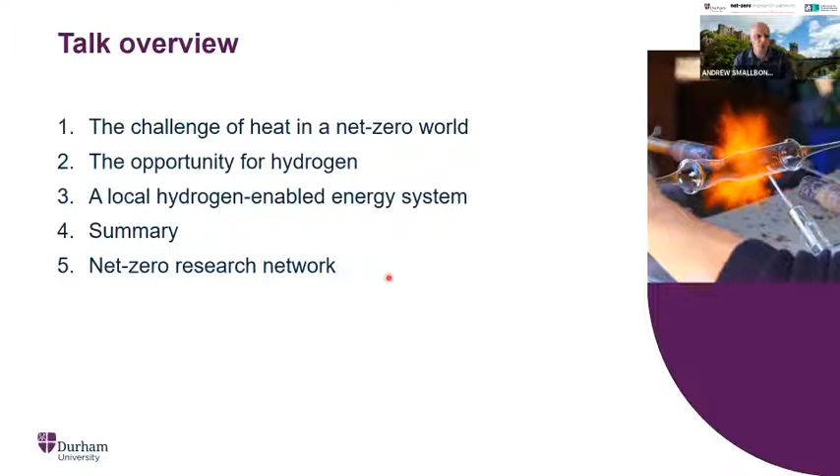So the challenge of heat is quite important, I think, when you look at it in the context of this very simple pie chart. And I'm sure, like me, everyone enjoys pies. You can see what the final energy demand is across lots of different sectors. This comes from the final energy consumption of the OECD countries, typically the wealthiest countries in the world, collated by the International Energy Agency. It shows you what, as consumers of energy, we actually expend our energy on. It usually surprises people to see that heat is actually about a third of the energy use, transport a further third, and then everything else in the final slice of the pie.

I think you can close your eyes when you think about energy policy and the pictures you see in the media around energy policy. Principally, they only show transport problems and electricity problems, but actually the forgotten cousin has been heat over the years. And I think that's now going to have to change quite dramatically. When you look at that heat segment, you can see where heat is actually used and who it's used by. We often think about heat as a problem for heating our own homes, because we see it on a day-to-day basis, but actually residential heating is only a third of that space.

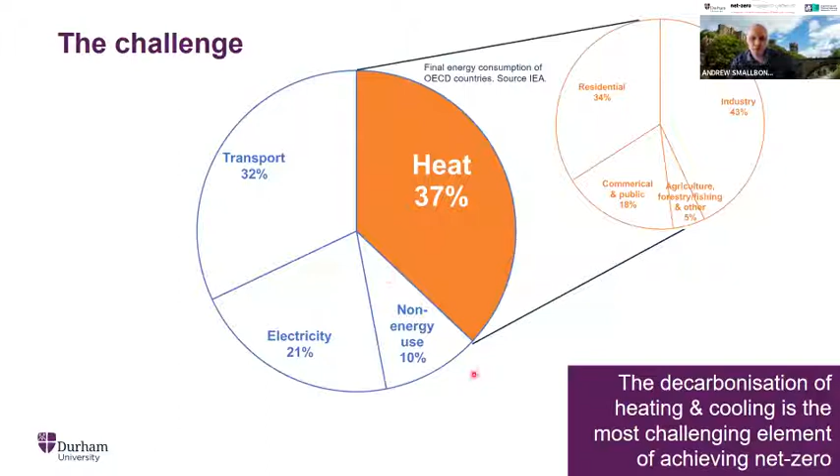And then to take that idea further and come back to the original pie chart and look at some of the challenges here around transport. If you look at transport in itself, most vehicles are actually 25% efficient and are using petroleum as their driver and powering the system with that petroleum. But actually, with a 25% efficiency, the rest of it is lost as heat. So that 32% is actually, most of it, heat itself or lost as heat. And you could say similar things about electricity as well.

For example, this data set includes energy users from the Middle East, and up to 50% of their peak electricity use is actually used for cooling their buildings and properties. So again, it's starting to fill up the pie, that in practice, heat is a major challenge. And then you have to remember also that electrical systems, in practice, a lot of the inefficiency is because they get hot, and you're trying to get rid of the energy from that out of the electrical system. So you can start to see that we start to build this pie up quite considerably.

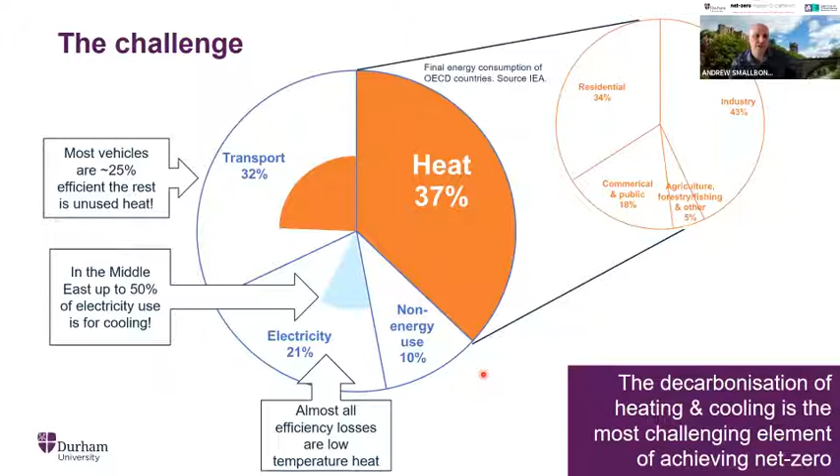Some of these could be discussed and debated, but ultimately it leads to the picture that the decarbonisation of heating and cooling is very complex, and it cuts across almost every problem in decarbonisation. And many consider it to be the most challenging element of reaching net zero. So you've got this overarching challenge, and then you've got the thing that makes it rather different to transport and electricity, because heating has a direct link to mortality. Not driving a car is possible, but turning off your heat is not possible because obviously there are lots of negative impacts.

And when you start to look at what's happened to society, and this data here comes from London, when the temperature goes down, you start to see why. Across the bottom there, you can see what the temperature was when somebody died. A very morbid picture, but you can see that the majority of people die in moderate temperatures. But the line at the top, shaped as a U shape, is actually the relative rate of death as we move to the extremes of temperature.

And as the outdoor temperatures drop below 2 degrees here, you can see that we get a very rapid increase of people dying, maybe not directly because of the heat, but the death rate increases. Now, if you contrast that with other places, this data here is from Stockholm in Sweden, and maybe their infrastructure is more appropriate for lower temperatures, and through technology and different ways of dealing with cold, they have managed to solve this problem. They no longer have a tick which goes up. So you can do things to alleviate the problem of increased mortality as a result of reducing temperatures.

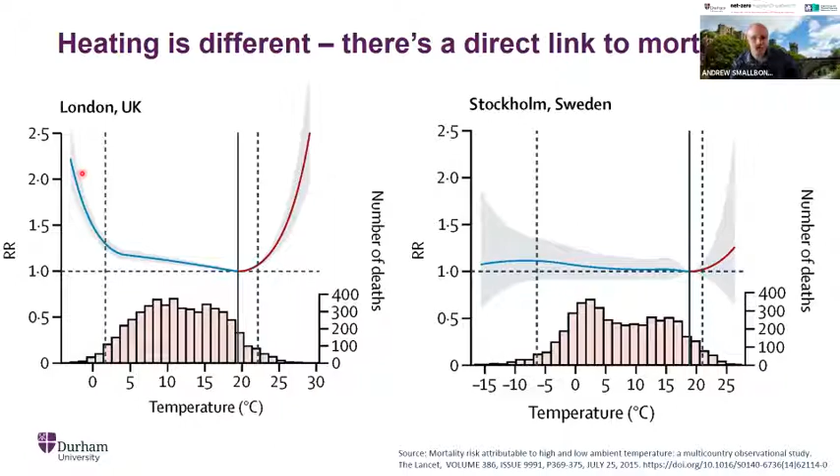Now, technologically, there are lots of different solutions out there for delivering on net zero targets whilst keeping the heating on, and many of them are mapped out in this slide here. The most common, and the one people have talked about considerably to date, has been improving efficiency and increasing the amount of insulation in your properties. This has been a driver well before we started announcing net zero, as has the implementation and increasing use of heating and cooling networks. And these two things will go on in parallel with our race to net zero, I'm sure.

This heating and cooling network has been constantly there through many generations. It's never really happened for practical reasons, and we may well not see this done at scale before the 2050 targets.

We certainly need residential heating and cooling solutions. In the UK, we obviously have well-established platforms for delivering residential heating, but we're also expecting to see temperatures rise in the UK, particularly in the inner city. So we may well see quite considerable changes in the amount of times you see air conditioning installed on the side of a property.

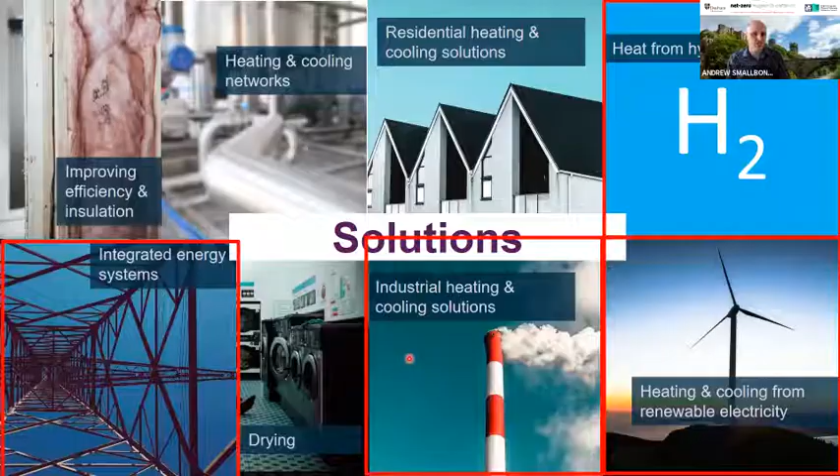This talk focuses on heat from hydrogen, heating and cooling from renewable electricity. There's some links with industrial heating and cooling, and we're certainly going to be talking about integrated energy systems. Now, there is a huge opportunity for hydrogen, and this is what we've been spending a lot of time and energy on in the last couple of years.

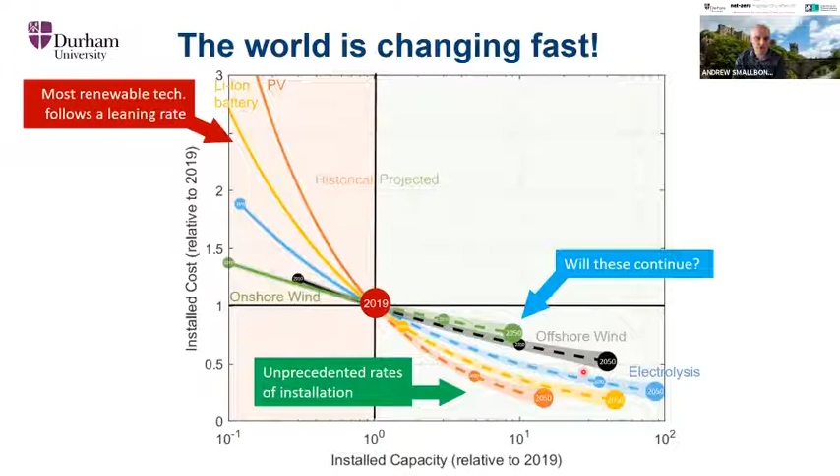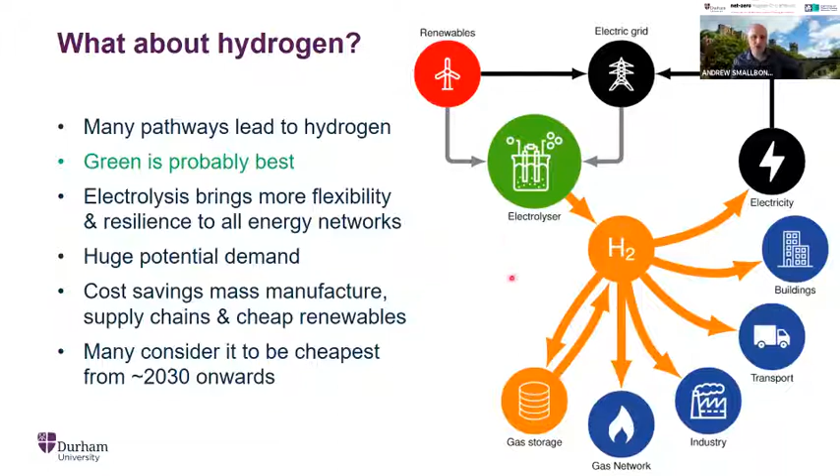And this will be driven principally by the cost reductions that come from electrolysis and the additional cost savings made by reducing renewable costs. Many consider this pathway to be the cheapest way to produce hydrogen from around 2030 onwards. So whilst in the short term we may well see the use of CCS as a model to remove the carbon from natural gas, its long-term application is through electrolysis here.

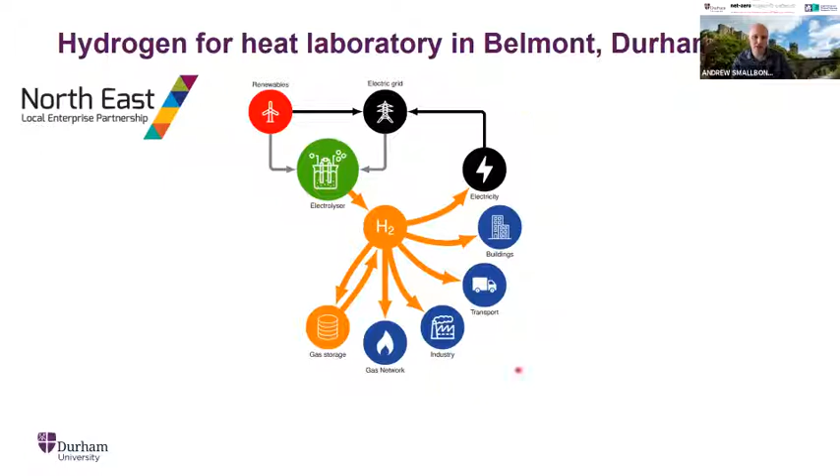And what we've been working on in Durham is to build up a hydrogen for heat laboratory in our Belmont site. This has been done through a grant from the North East LEP, where we've built a platform which will allow us to demonstrate this kind of energy system in practice. So the first thing is we've built an electrolyzer system and gas storage system where we can demonstrate the pathway of renewable into the electrolyzer to store hydrogen and then deploy that as electricity and provide that back to the grid. And we're starting to finish this system and commission it right now.

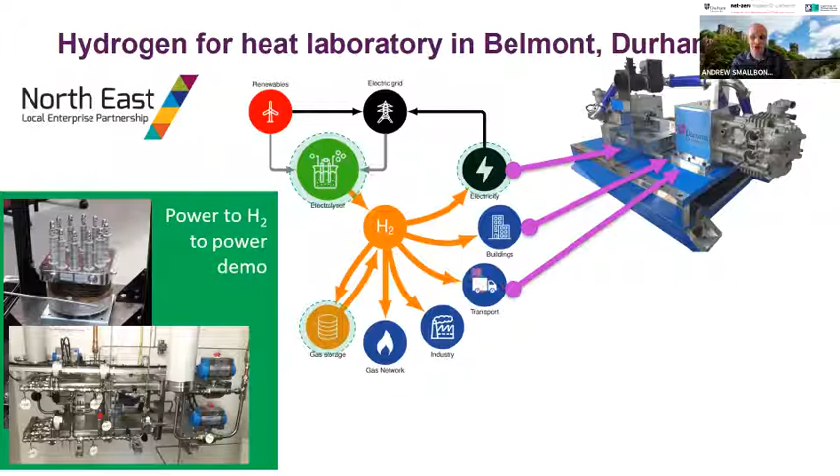We're also starting to commission a combined heat and power system, which will be able to produce electricity from hydrogen, but also be able to produce heat for buildings. And the same system could also operate on a transport vehicle to provide electricity on board the vehicle.

We're involved in the IDRIC project, which is the UK Industrial Decarbonisation Research and Innovation Centre, a £20 million investment into academia to support the decarbonisation of industry. And we're going to be working closely with the Teesside cluster on their transition to net zero. We're going to be modelling the industrial network and energy networks locally and embedding hydrogen in there to see how it could be best supported.

Finally, we're involved in the Future Grid project run by the National Grid, and it's called Future Grid. And the objective is to supply 100% hydrogen into the national transmission system and to understand its dynamics. So that then enables us across our laboratory to analyze all the different nodes across this potential future hydrogen energy system.

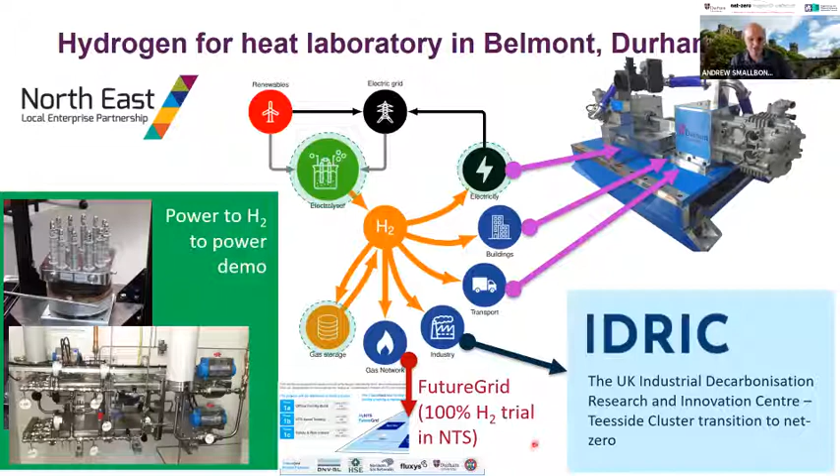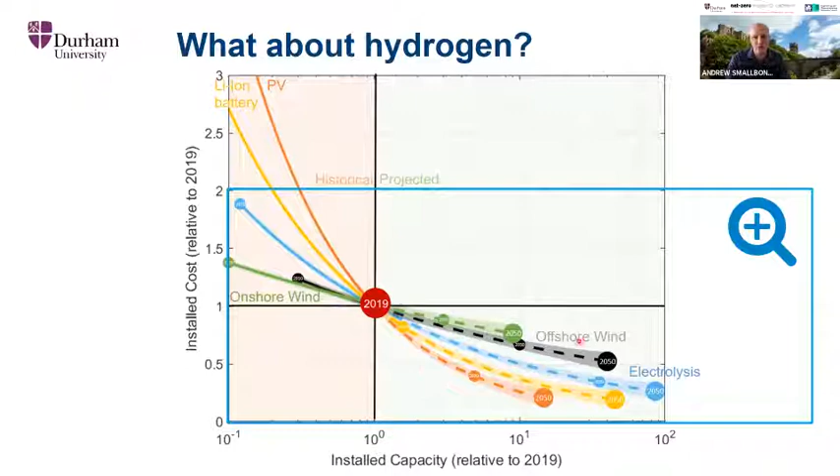Now, coming back specifically to this chart, which I was mapping out and talking about earlier, I was focusing on this blue line now, the line that has been plotted for electrolysis. And if we focus in that in more detail and we plot only data for electrolysis in there, we kind of come up with this more detailed graph.

So up here at the top, you can see some of the raw data that's available for large-scale electrolysis in terms of its costs. Okay, the data up here is from around 2010, and as you can see, there's not that much data back in that period of time, and there's more data as we move forward. That's simply because the availability of large-scale deployment of PEM electrolysis is only a relatively recent activity. So there's very little data to base this on. And again, that's historical measurements.

If you then start to look at this data in more detail and think, well, this is how a power law can be fitted through this data to kind of make an estimate as to what the future costs might be, you can start to see that actually you could probably fit this line through this data set a number of different ways. A lot of the weightage is actually towards this one here, for example. So by playing with those kind of parameters, you can actually start to see how important, and this blue area here represents all the different ways that you could potentially selectively draw lines through this data to kind of show the uncertainty that there really is around the cost of electrolysis going forward.

Now, what I've also plotted in here is different analysis and different activities that people have tried to estimate the future price of an electrolyzer system. Some of them are more pessimistic than others, but overall you can see that they're all expecting costs to come down quite significantly. I guess around the 2030 era, we're looking at 10 times what we've got of our current installed capacity, and then maybe 100 times around the 2050 timescale. You can see actually as you move to some of these other analysis, they're expecting renewable hydrogen to scale up more than 200 to 300 times compared to what we've got right now.

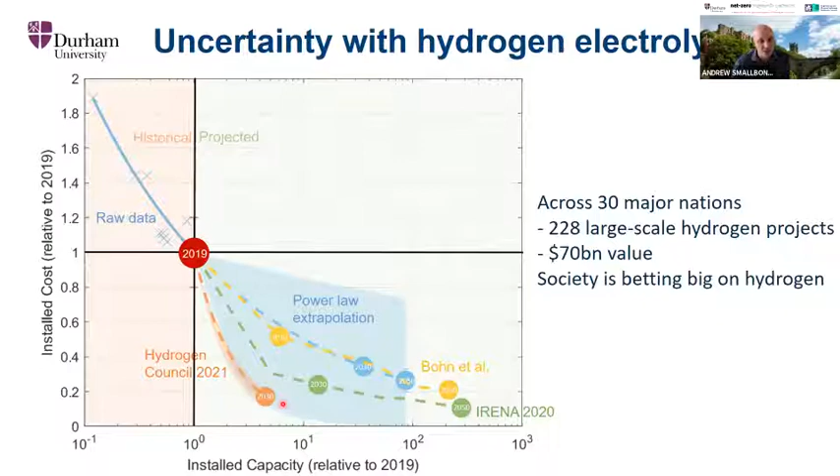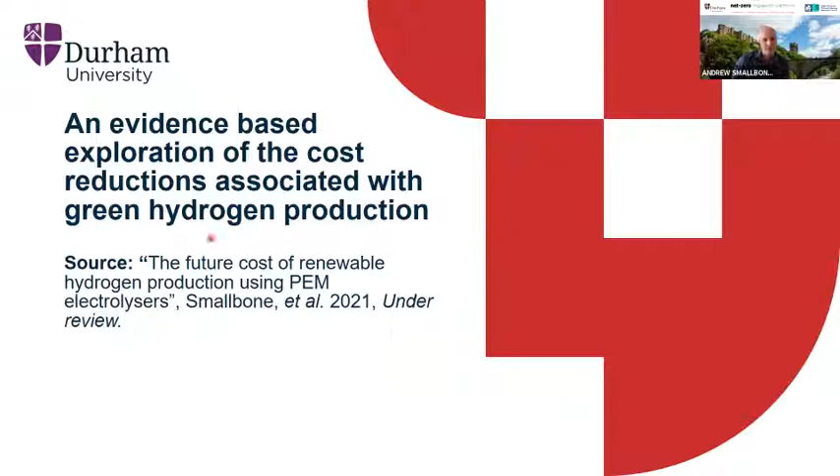So what we wanted to do was to try and understand this dynamic of what is the future price of hydrogen, and how could this be achieved. So we started to look at this opportunity. So we wanted to do an evidence-based exploration of the cost reductions associated with green hydrogen production. And actually this is some work that's currently under review by the team. And what we did was we went out and we built what's called a techno-economic model. So it brings together the data that we've got around the technical side of a system, and tries to understand also at the same time the economics of building such a system.

So we based our analysis around building lots of smaller electrolyzer systems that could be deployed in parallel. So we based it around a 200 kilowatt system. I built a technical model of that system, reflecting the efficiency, energy consumption, and the required different sizes of different components within that system. We then built an economic model, going through component by component, trying to understand each component's cost, its potential supply chain, and then finally bringing forward a model of the manufacturing process itself.

Again, manufacturing each component in a common site, understanding what raw materials they required, the production line itself, including the staff, and then to take that from a system which was maybe producing 10 per year to thousands per year. And as you can imagine, this would start off with a small team building by hand, and then at the other end of the scale, we would be producing thousands of units, and it would be either automated or semi-automated.

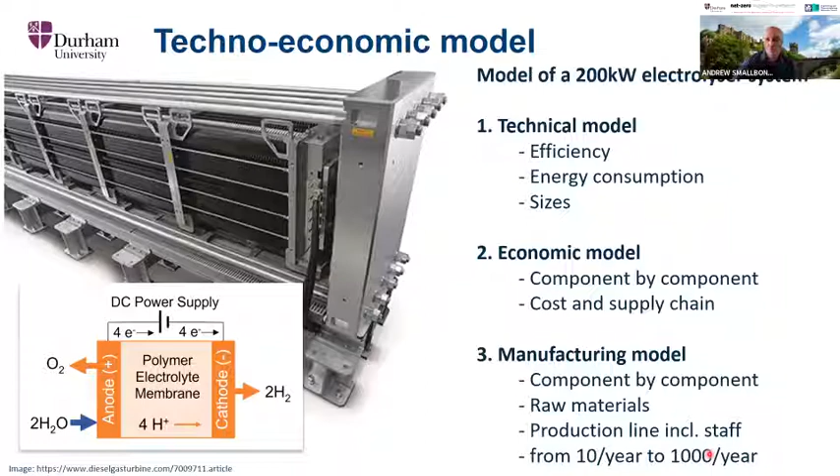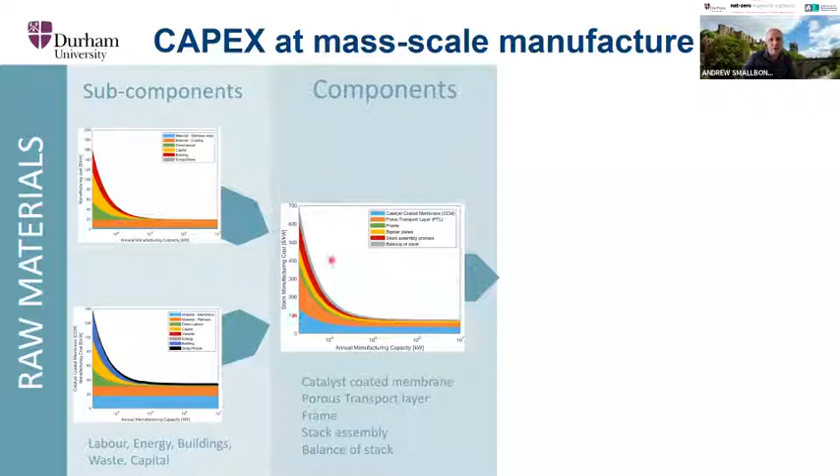Now, when you look at the model that was developed, we kind of start off with raw materials. We then figure out what are the subcomponents of an electrolyzer system, worked out what the labor costs, the energy costs, the building rent costs, any waste, any capital that would be required to build them, and then to build that up into the components that could be used to assemble the system. And then you end up with the full system, the full PEM electrolysis system.

You can see here from this chart, at the bottom here, we've got the annual manufacturing capacity. Note that this is a non-linear scale, it's a log scale. So here we've got a very small number of units being built per year. And at this end, it's the 5,000 units being assembled.

And as you can see, as you scale up the size of your plant, the total cost, which would be the sum of all of these different components, actually comes down. You can see that moving quite dramatically down there from about $2,000 per kilowatt down to about $500 per kilowatt as you move through this curve.

You can see that it's broken down quite interestingly, by individual components. The stack, which is, I guess, the main bit, the stack of electrodes. That's the blue. The balance of plant, which is basically the supporting infrastructure that cools the system or dries the system. That's the orange here. You've then got installation costs, and then the top bit is the markups. The business who's building these systems has got some kind of profit.

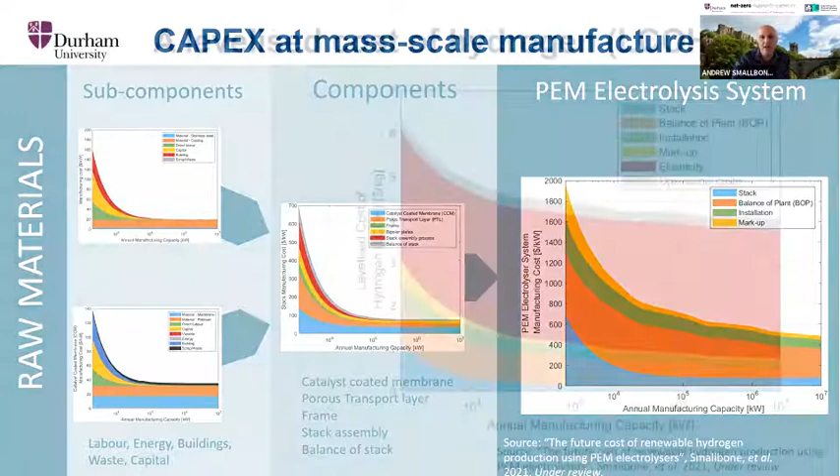So in the case of the stack, as you move in this direction, you're mainly dominated by the raw material cost of the system and less by the human or resource intensive aspects associated with having staff. So we're likely, through the scale up of manufacturing, to be able to make dramatic savings on the cost of the system. And we can take that idea a little further and go from the capital cost of an electrolyzer system to establish a levelized cost of hydrogen.

Now, building on the capital cost of the system, you can make lots of different assumptions about the future electricity price, how much you would use the electrolyzer, so its capacity, and also the operational cost of a large scale plant. And ultimately, this is what yields your levelized cost of hydrogen. We've made some simple assumptions, and there are lots of ways of painting this picture, but generally the story is as I describe in the next few slides.

Now, for context, often hydrogen is represented in price per kilogram. This is quite convenient because about 1 kilo of hydrogen has got the same amount of energy as 1 litre of gasoline. So when you see 1 kilo of hydrogen, you can relate that back to a litre of fuel.

But what you can see here is that as you move from small scale manufacturing to large scale manufacturing, the cost of electricity is overwhelmingly the most important factor in driving the price of hydrogen. Initially, at small scales, like in current times, it's the capital cost of the system plus the electricity, but the system itself becomes much less significant as we manufacture more and more of these systems.

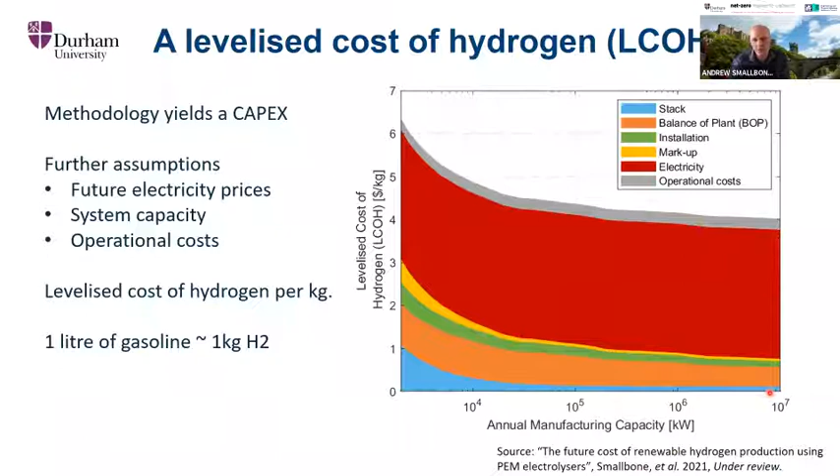Now we can take that and start to then think about, well, what about if we scale up to 10 times or 100 times of green hydrogen? The levelized cost of hydrogen currently would sit around here, this kind of figure from this kind of technology, and we would estimate that manufacturing cost savings that I just described would reduce this down by about a third, which if we were manufacturing at 5,000 units would give us a cost of 4.16.

And then if we start to scale up 10 times larger, we would start to expect to see other factors coming in. So we would expect to improve the efficiency and the lifetime of our system. And we would also, during that time, expect to see the offshore wind costs coming down. So offshore wind is probably going to take off another $1 off of that price, bringing us down to the $2.63 at the 10 times scale up.

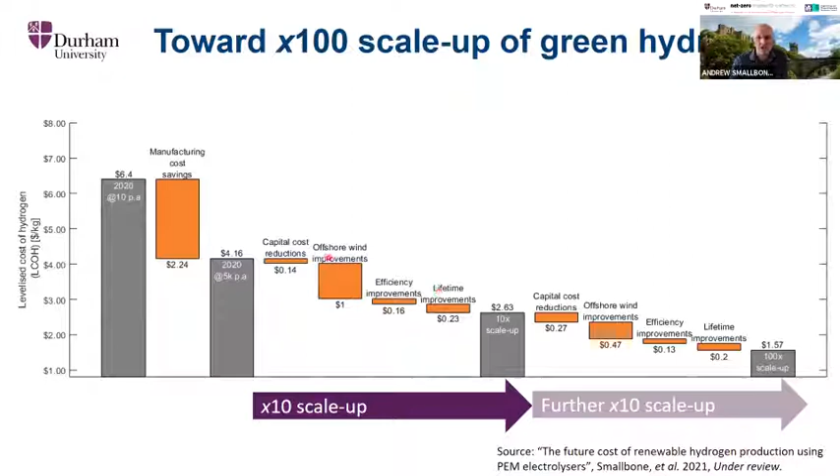Again, we could go forward and take that up to 100 times scale up, and a similar trend would exist, which would take us down to the $1.57. $1.57 for a kilogram of hydrogen would be very disruptive and would be transformational in terms of the sector. But you can see there the story through how the price of hydrogen is expected to come down is shown as a combination of this manufacturing savings, some improvements to the system, as well as savings driven by offshore wind reductions.

So these costs have implications on what might happen to the hydrogen economy. The first is to show that same chart again, and to remember again that there are many pathways which lead to hydrogen, and we are focusing on just one. And of course, there is the opportunity for scale here. But the most common question you get is that there are other pathways to coming to a decarbonised economy, and these need to be considered in context with what's happening here.

So the first thing to say is that we've focused principally on the cost of hydrogen production, but there's other factors as well when it comes to the cost of a system. You've got the distribution of hydrogen. So that could be through pipelines, it could be through truck delivery of gas, or it could be truck delivery of liquefied hydrogen. So there are different ways of moving it around.

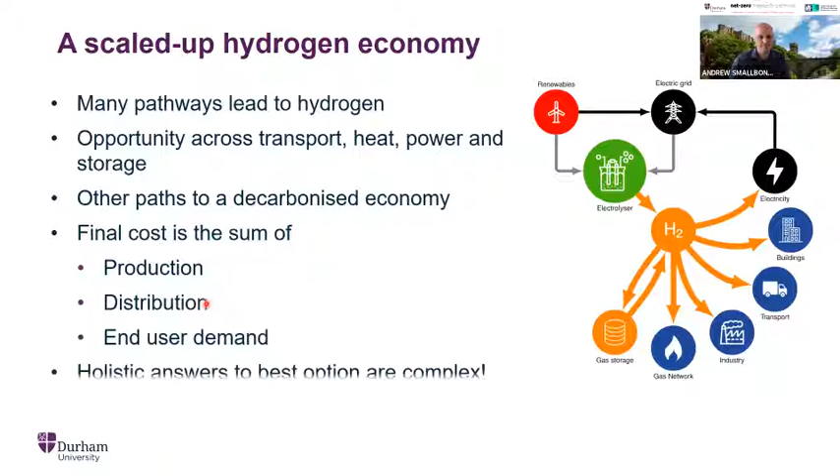For simplicity, we're going to assume that hydrogen gas is distributed via a natural gas network which already exists. So somewhat similar to what we have today, but the hydrogen system has repurposed the natural gas network. This has been selected on the basis that it's the cheapest model for distribution. And if it doesn't work here, then hydrogen is more challenging to deploy in other ways. So that's why this one's been picked.

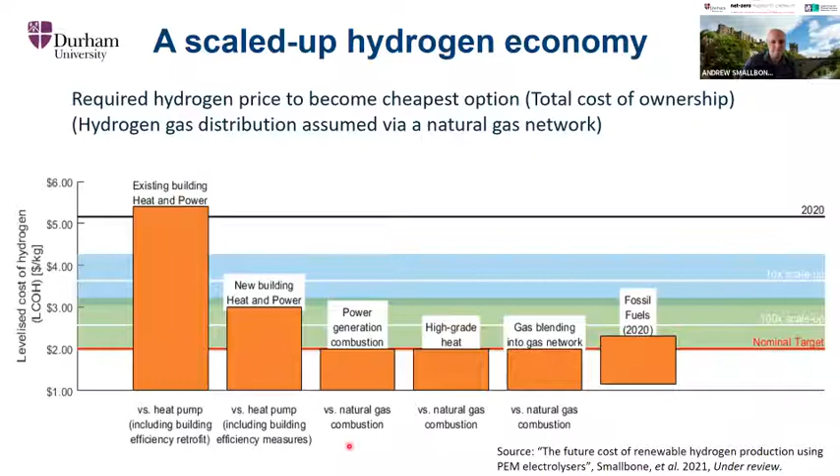So quickly to summarize: hydrogen is an option for heat, transport, power and energy storage, and a scale up of green hydrogen of up to 100 to 300 times is expected to deliver net zero targets. Green hydrogen is expected to become cheaper than blue within the next 15 years. Mass manufacture, lower electricity costs and improvements are expected to reduce the capex and overall cost of these systems. And even at the 100 times scale up, net zero heat is more expensive than fossil derived fuels. And this last point is extremely important. We often think about net zero heat, but as I described at the very beginning, there's a link to mortality if not enough heat is available at cost.

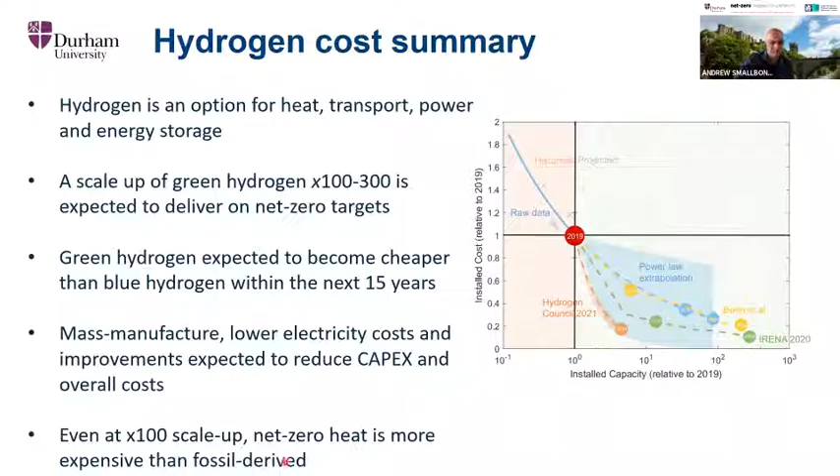So now I'll quickly talk about a local hydrogen-enabled energy system. This one is related to a project we're undertaking called Zero Carbon Emission Integrated Cooling, Heating and Power Networks. Effectively, this project looks at the techno-economics of hydrogen-enabled energy systems and attempts to quantify their value in terms of resilience and flexibility, and to demonstrate them in the lab. We're also quite keen to look at consumer attitudes to hydrogen, where initial feedback from lots of projects suggests consumers' fear of them may well be overstated.

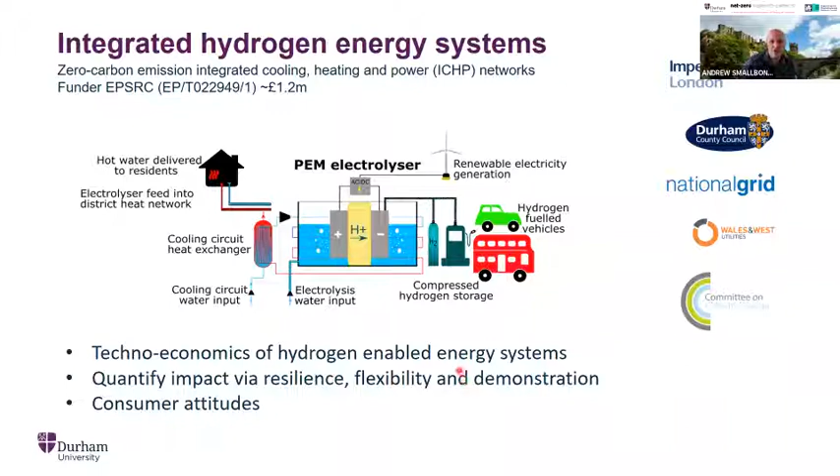What we wanted to look at particularly was the opportunity of an energy system where large-scale PEM electrolysis was carried out. What we know is that the electrolysis system is between 60 and 70% efficient. So that's 60 to 70% of the electricity turning into hydrogen itself. The rest is actually lost or dumped as heat. Interestingly, the temperatures of that heat are quite high and actually quite compatible with the kind of temperatures you might want in a heating network.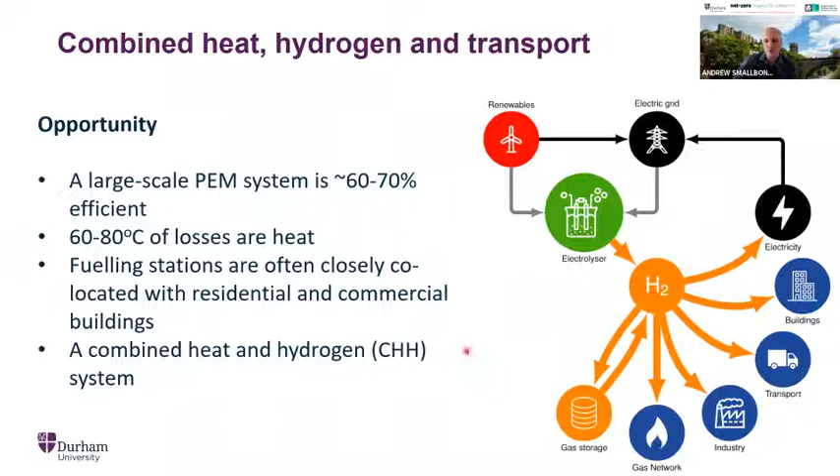So given that fueling stations are often closely co-located with residential and commercial buildings, we wanted to look at the potential for a combined heat and hydrogen system, where the heat would supply thermal energy to residences and commercial buildings, and the hydrogen would be used to fuel transport vehicles. So just to illustrate what that would look like, renewable electricity would be supplied to the PEM electrolyzer.

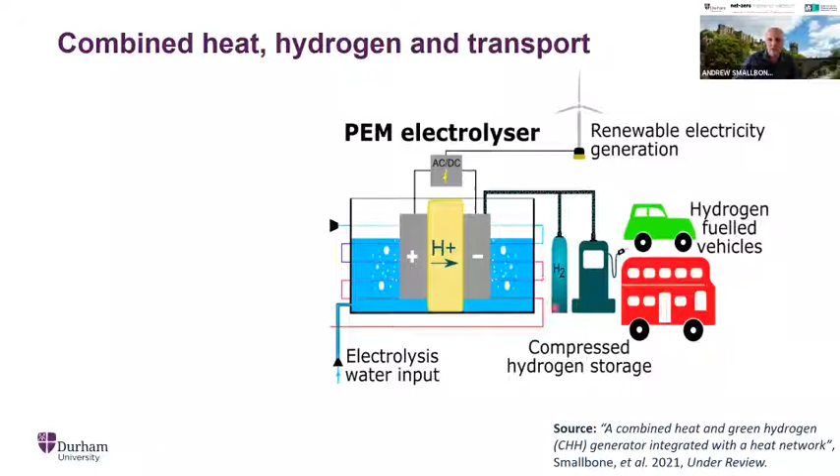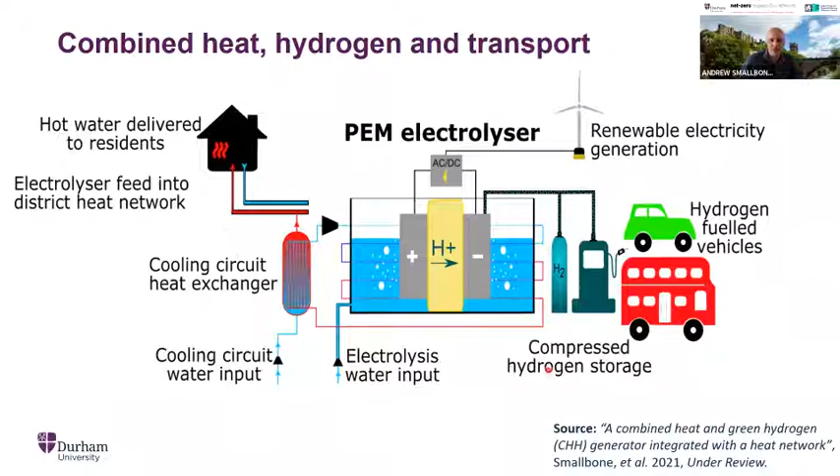The PEM electrolyzer would then provide hydrogen and store compressed hydrogen for use on hydrogen-fueled vehicles. And then that system would be cooled effectively by water, which would then be used to supply hot water for heating or domestic hot water within buildings. And the question is, would this be of value, and does this make sense?

So what we came up with was we developed a model of a PEM electrolyzer process, and we gathered some data from a 1 megawatt system, and that chemical process model plus the data allows us to work out where heat could be captured from such a system and what might be possible. So the hydrogen gas itself was actually 63% efficient. That's where 63% of the energy went to, but 30.4% of the heat can be recovered from the stack, and then the hydrogen gas comes off the system hot. So there's two potential pathways for capturing additional energy from the process, which would normally be released.

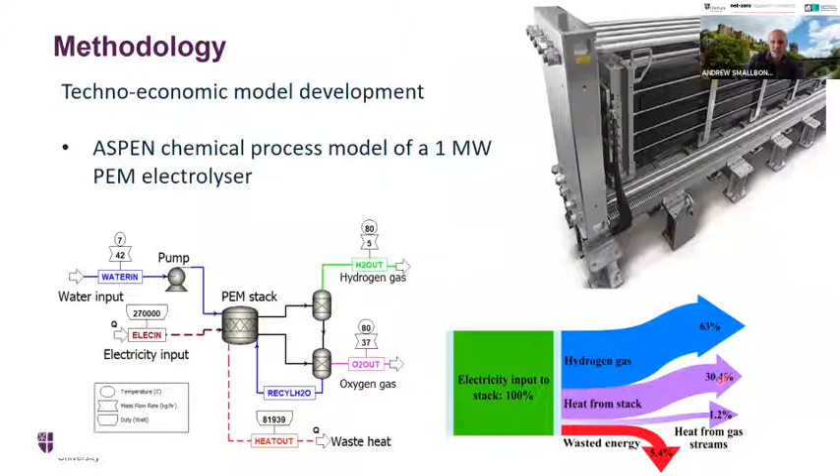We then took that forward and established a scenario, which we called a 2030 hydrogen fueling station scenario, where that fueling station would have a 12 megawatt electrical connection, and it would run off peak, so between 1 and 6 a.m. The system would effectively fill itself up with hydrogen and produce just over a ton of hydrogen, which would be the equivalent of 15 trucks or 200 cars worth of hydrogen gas.

And that process would produce 19 megawatt hours of heat per day. And the idea was that we would sell that heat back to the district heat network at their cost price, so consumers of this heat wouldn't pay any more than they would otherwise. And this works out to be about 190 homes worth of heat, or about 20% of what would be loosely termed a large heat network.

So the observations from this analysis were that if you do it this way, obviously your price of hydrogen or heat is highly sensitive to the price of electricity, because it's the main cost to the system. And of course, we're planning to run the system off peak, but the price of electricity obviously varies for lots of different reasons. So this is one thing to be careful of.

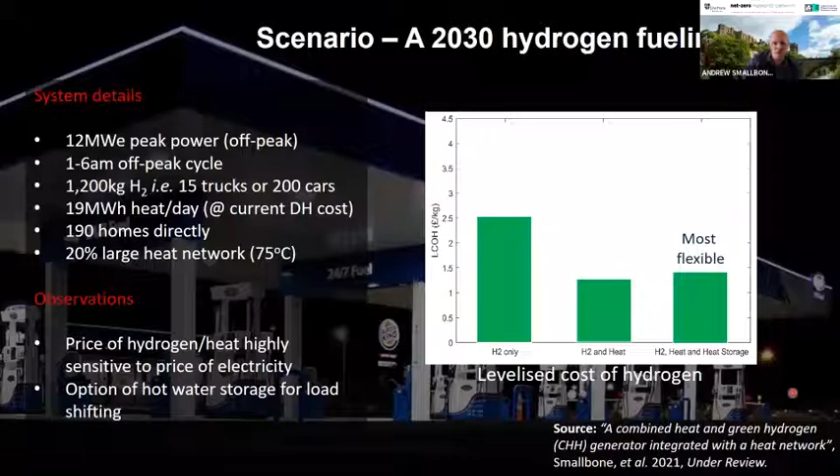So we're continuing to look at this concept in more detail now, and we are pushing on with that. To summarize the outputs, this co-production of heat and hydrogen for transport brings huge cost benefits to both local users of the hydrogen filling station and the local community that sits around it. There's obviously scope that hydrogen can be used for industry or direct heating too, so it's not just about transport. What's interesting is that the electricity is distributed off peak, so rather than going through gas networks or trucks, you get a lower cost potentially as a result.

And we are putting forward this more distributed model of hydrogen production for transport, and integration into heat networks, which is a solution which decarbonizes both sectors. This solution would bring overall energy efficiency up from 63% to more than 90% when you add up what's possible here. And of course, it makes the whole system much more resilient too.

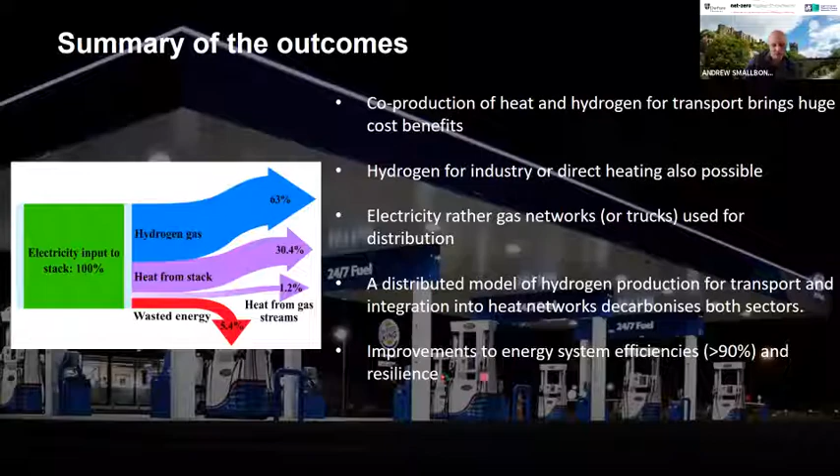So quickly, to just summarize, really, I've discussed some aspects of the decarbonisation of heat. I think I hopefully have illustrated that it's complex. It's certainly a challenge which cuts across every sector. It will cut across every industrial process. And I would imagine it will affect every person living in the UK over the next 30 years.

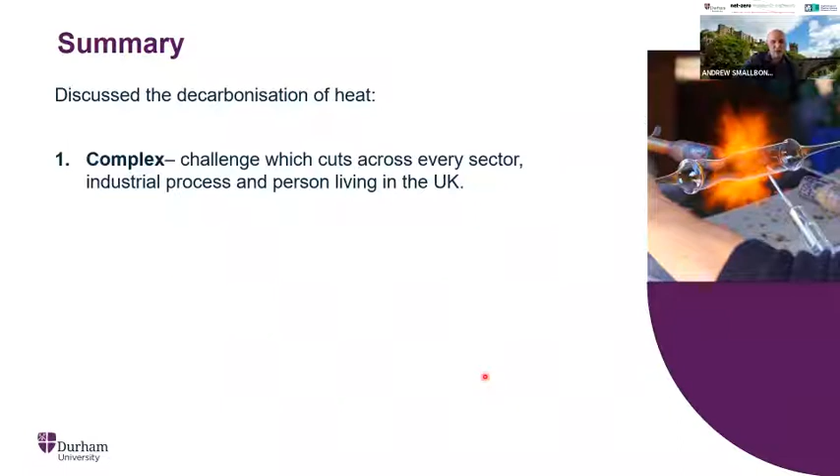There's hugely changing dynamics of price in renewable energies, and heat is likely to become more expensive, mainly because of a large capital expenditure is required to replace the fossil sector. And some very difficult decisions need to be made, and there's still uncertainty actually as to what the best solution is for each region, sector and application.

And I've given some examples of how heat can be decarbonised, and there's huge scope for innovation, way more than I've been able to talk about here. And there's an opportunity for solving this challenge.

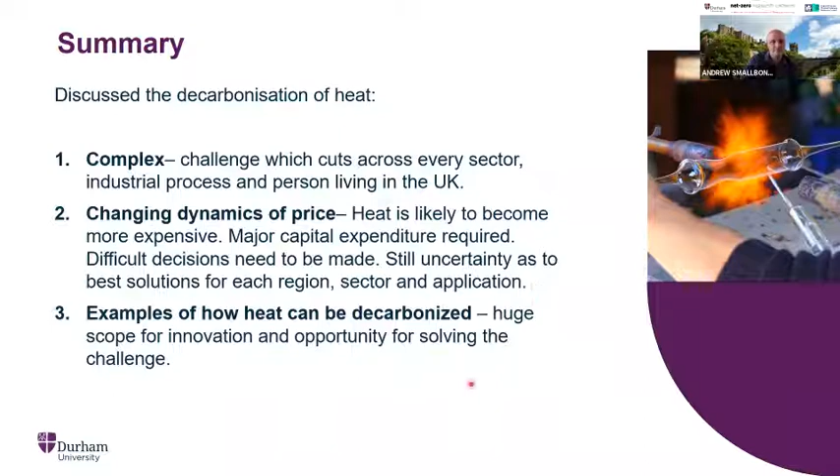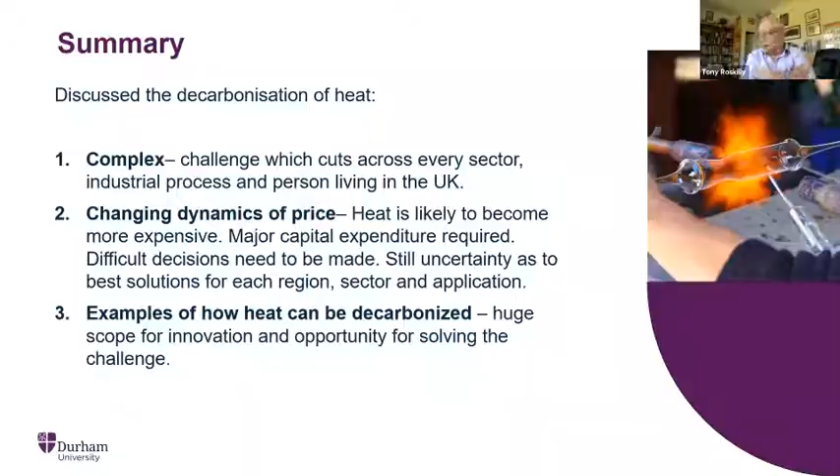I think the first question was about this. If there was 10 times as much production, what proportion of heat use would that be? So what's that equivalent of? How much can 10 times that increase in hydrogen allow us? And how does that compare with other fuel costs?

So the numbers that I put up at the beginning, which was talking about scaling up hydrogen production, those numbers have come from multiple sources. Predominantly they're from the International Energy Agency, and actually represented consumption globally. So I'm talking about 10 times scale up, 100 times scale up, of global production. Within those analyses, they would have done thumb in the air calculations about how much they would expect to be used by heat, how much by transport, and how much by industry.

My view is that obviously all of those are fundamentally linked to the cost. Whenever you're seeing some of these analyses and you go back 2 years ago, 3 years ago, all estimates of how much hydrogen we would need were a fraction of what they are now. So people, as they're more investing in the idea that hydrogen can go forward, are revising up how much hydrogen we will need.